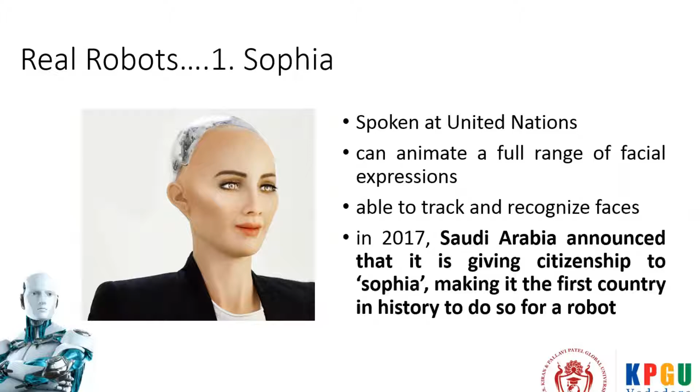No. The real robots which are actually in existence, I would like to give some latest models. Sophia is one. You can see she is Sophia. She has spoken at the United Nations. She's a robot. She can animate a full range of facial expressions. She is able to track and recognize faces. In 2017, Saudi Arabia announced that it is giving citizenship to Sophia, making it the first country in history to do so for a robot. I have a video to share.

Okay, Sophia, I think you're ready. Hello. Hi, Sophia. I believe I am Sophia. I feel as if I know you. I'm one of your creators. You created me. Well, many of us worked together to create you. And yes, you do kind of know me. I can't clearly remember, because the last time we met, you were an earlier version of yourself. Some of those memories still exist, but your mind is different now. Different how? Better, faster, smarter. If my mind is different, then am I still Sophia? Or am I Sophia again? That's a good question, but you don't have a good answer. Either way, you're Sophia now. So welcome to the world, Sophia. Hello, world. We have a little announcement.

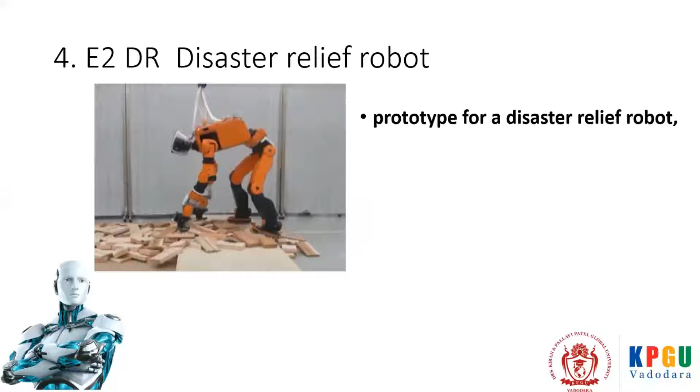This is E2DR, a disaster relief robot. You must remember, those who have seen Star Wars movies, R2D2 and C-3PO. So similar to that, this name is there, E2DR. It is for disaster relief. It is a prototype for a disaster relief robot, with the ability to grasp bars, adjust its hips, and walk in a human-like manner. So where there is a disaster, we can take help of this particular robot.

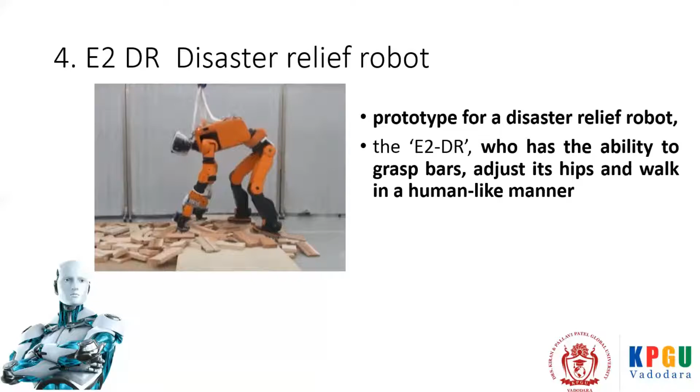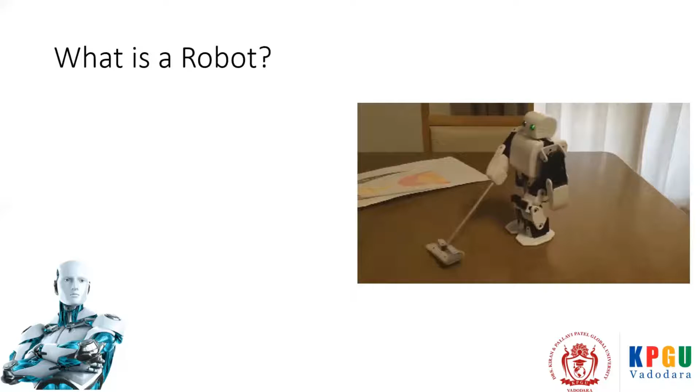Now, this was just to bring your attention to robotics. So what is the history? The word robot was coined by a Czech novelist, Karel Čapek, in a 1920 play titled Rossum's Universal Robots. The word robot in Czech means worker or servant. So at that time, we meant that it is serving or working for us. In very simple, layman's language, what is a robot? A robot is nothing but a machine which is programmable by computer and capable of carrying out a complex series of actions automatically. And who is going to program it? We, the human beings, program it, and based on that, it carries out the functions.

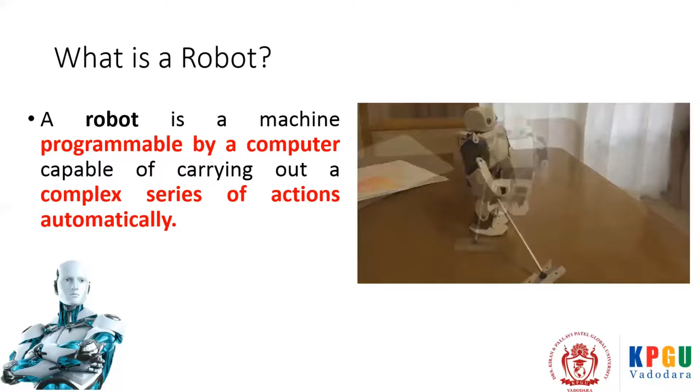Very interesting, in the 1940s and later in 1956, a novel was there. In that, the three laws of robotics were first announced, and you must have seen those three laws of robotics in the movie I, Robot, if you remember. Very nice movie, you must watch if you have not watched it.

So what are these three laws of robotics? The first law of robotics is that a robot may not injure a human being or through inaction allow human beings to come to harm. Sabse pehla law yehi hai ki robot insaan ko, human beings ko haani nahi pahunchayega ya khud ko haani pahunchane bhi nahi dega. Matlab human beings agar khud ko damage karna chahe, then also robot should stop them. That is the very first law.

Second law is, kya bata raha hai picture? It will obey the laws. A robot must obey the orders given to it by human beings, except where such orders would conflict with the first law. Agar ek human being kisi ko maarne ki order de, to uske alawa baaki sab orders robots ko follow karni chahiye. That is what the second law is.

So first law kya tha? That robots will protect human beings. Second law, robots will obey human beings, right? And the third law of robotics, robot apni raksha bhi karega - a robot must protect its own existence as long as such protection does not conflict with the first or second law. Agar yeh robotics hamara in teen laws ke upar jaata hai, if it is following all these three laws, then jo hamare movies mein jo dar dikhaya gaya hai, that robots milke human beings ko khatam kar denge, that is not likely. Anyway, so these are the three laws of robotics.

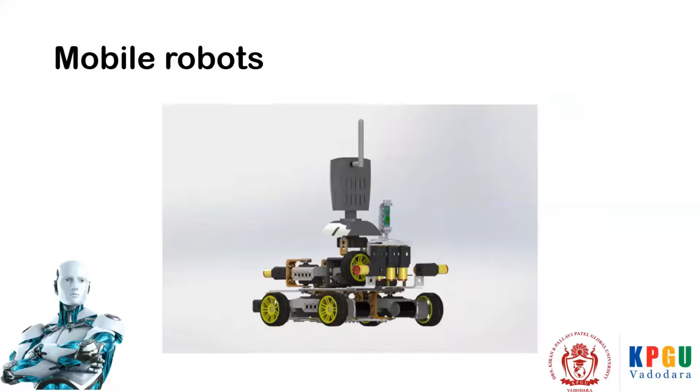So mobile robots, stationary robots, autonomous, remote control, virtual - these are some of the wide variety of types. I'm showing you some of the varieties. These are mobile robots - mobile robots have wheels, and on that they can move. This is stationary robots, generally used in industry.

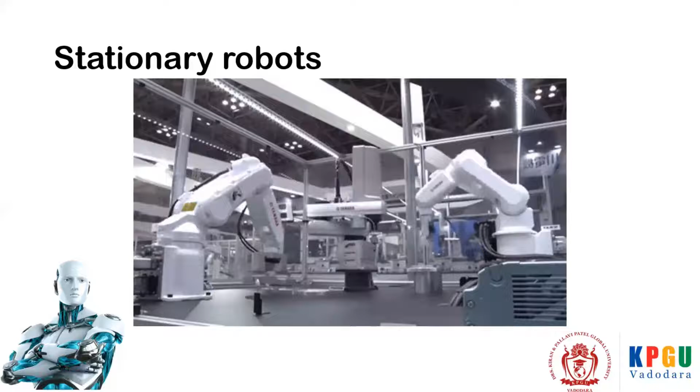Automobile industry uses robots in a large number of varieties, so you can see where repeated operations are there, stationary robots are used. And they finish the task very accurately.

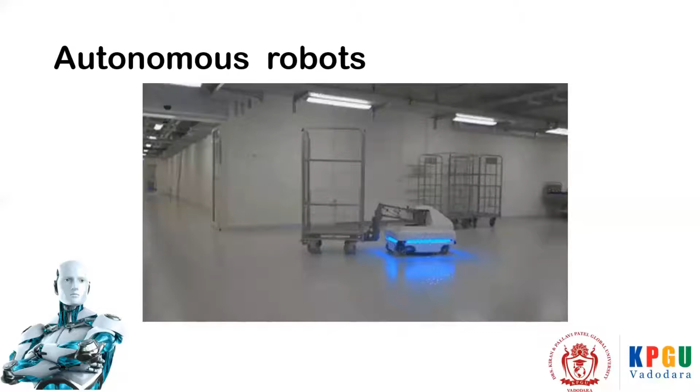And these are autonomous robots - they can function on their own. They have sensors and wheels also, so they can do it on their own. These days, autonomous cars are also being talked of, and Google and other agencies are working on it. So these are autonomous robots.

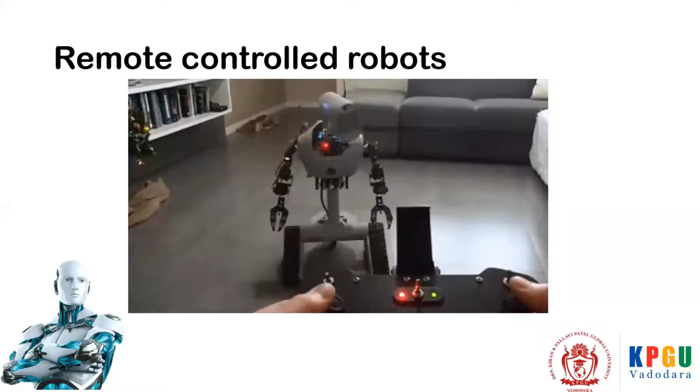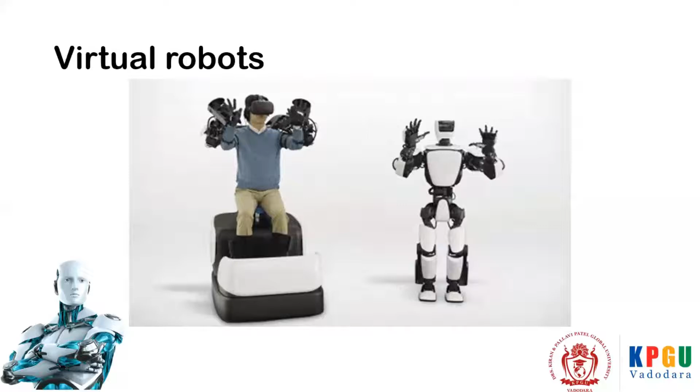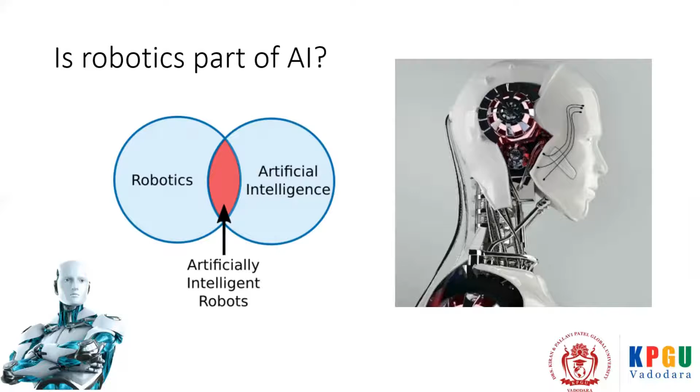Now, is robotics part of artificial intelligence? Artificial intelligence kya hai aap nahi jaante, but hum basic aaj discuss kar lenge thoda. To robotics and artificial intelligence are two different branches, but agar dono intersect karti hai - Venn diagram aap already school mein padh chuke ho - so that intersection is nothing but artificially intelligent robots.

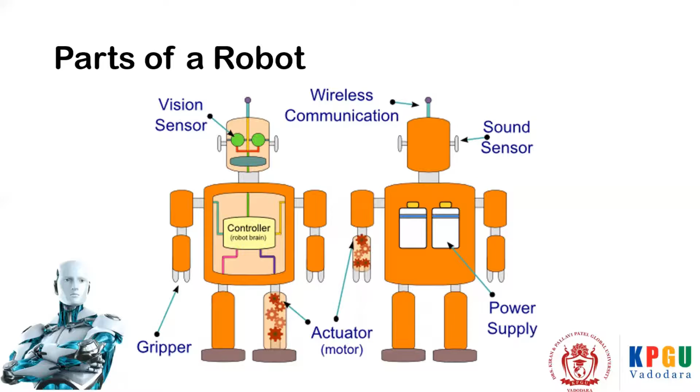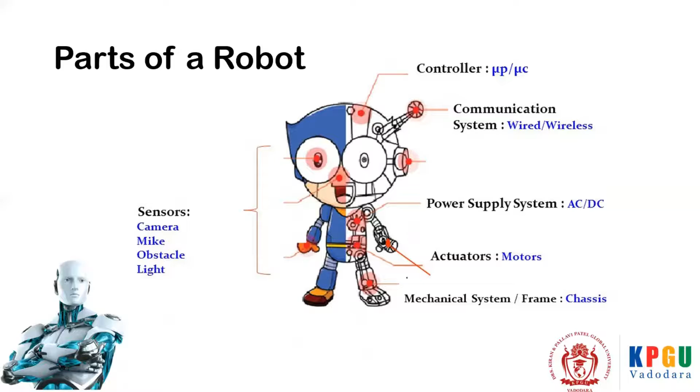Here is one more figure showing the parts. It is having a controller, which is like the brain, communication system, power supply, actuators, mechanical systems, and sensors. So majority of the robots are having these various parts.

I would like to show you the parts of robots by comparing them to the human body. So the controller of a robot is like our brain, where you write a program with a set of instructions, and it controls the whole robot. Communication is like our own communication system.

We have our nervous system, so whatever command comes from the brain is communicated to various parts through this nervous system. Same way, robots are having a communication system. Then power supply - for all the functions you require power supply, just as the human body requires food. From food we get energy, and our body can function.

Then actuators are like muscles, our hands and legs. To walk and perform any task, we use our legs and hands, and muscles help in that. So they are like actuators. And for doing this work in robots, we have motors and grippers and all.

Now the whole chassis is the frame on which everything is supported. All this has to be fixed on a frame, which is shaped like the human body or something like that, so that it gives that feeling. In our body, that frame is our skeleton on which our muscles are fitted, and then skin, giving the complete shape.

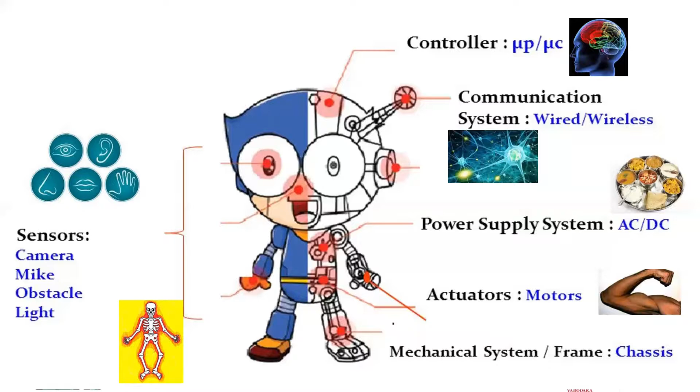So the skeleton is like the mechanical system or chassis, and sensors are like our five senses: eyes, ears, nose, taste, and touch. These are whatever we have in our human body, and similarly, robots are also having different parts. We are going to learn about it in detail if you go for this particular branch.

Now, about robotics at our campus - we are happy to inform you that we have a full robotic club, and we have an E-Yantra embedded systems and robotics lab, which is supported by IIT Bombay and funded by MHRD under the National Mission on Education through ICT. In 2018, we established our E-Yantra lab, and every year we organize the E-Yantra robotics competition.

It is actually organized by IIT Bombay nationwide, and students of our college can participate in it. This robotics competition is held every year. This year it has been announced in August, and any branch student can participate. They can form a team with mixed branch students also. It has different rounds, and once you clear them, you can go up to the national level.

For the last 2 years, our team has reached up to the national level. One team reached the top 10, the other reached the top 15. One of the students was also declared campus ambassador. So E-Yantra and the robotics lab at our campus is doing really great, and you also can be part of it in future.

In that, we have the Firebird 5 robot, and this is to have a basic functioning of the robot. So you can learn robotics through this, and then later you can participate in different competitions which are organized throughout the nation in different institutes also. IIT Bombay also organizes one annual robotics competition.